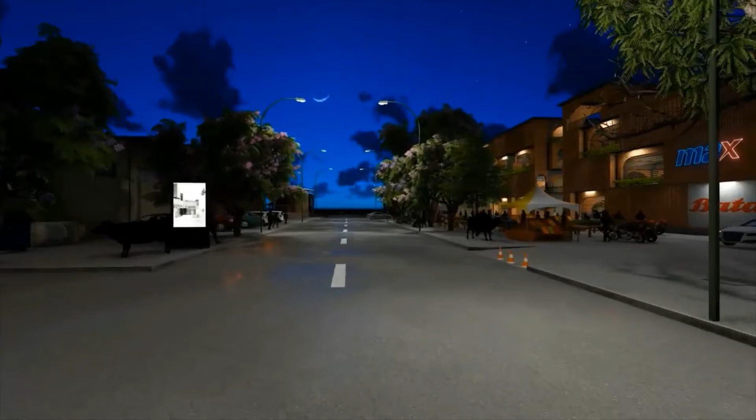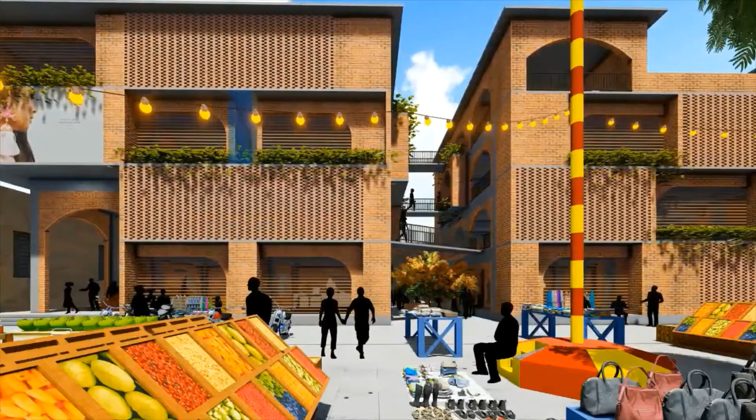The unassuming form of the building subtly highlights the market and the people up front, creating a vivid contrast of colors and texture. It doesn't derive away from what's really important, the people and the culture of the place. In fact, it uses this factor to drive people into the building.

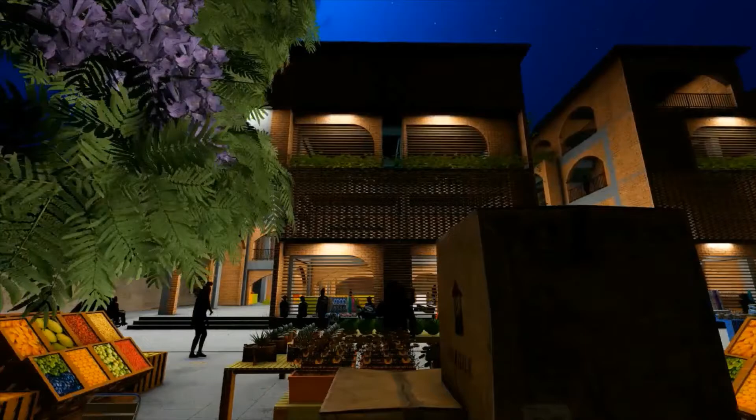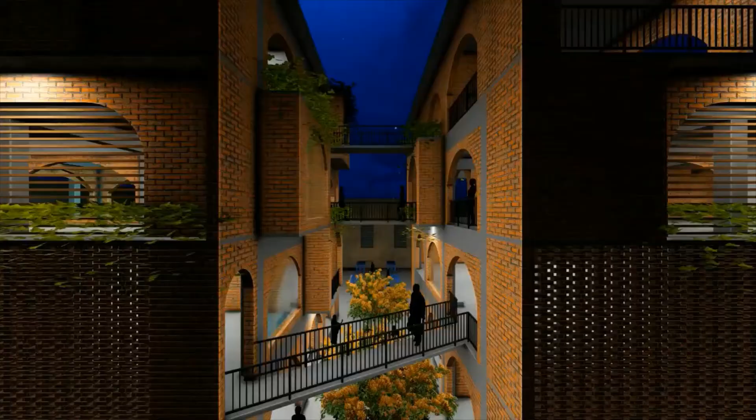The building splits into two to allow a seamless transition between the two markets, integrating it into the building and, in the process, creating a street on its own.

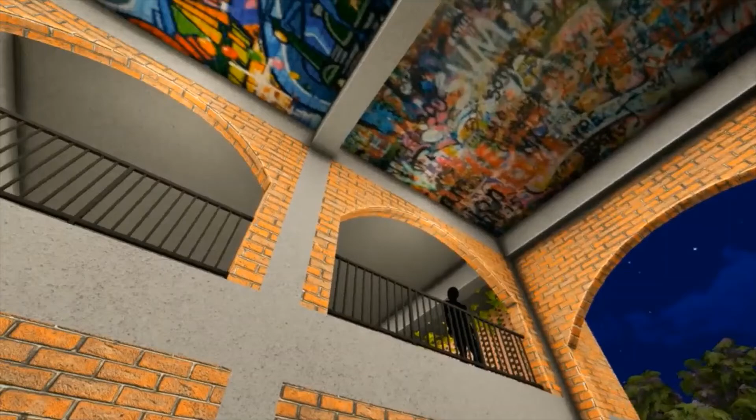It isn't an alienated structure. It is meant to be played with, painted on, touched, and to be made a part of those who use it.

Hi, my name is Aisha Eki, and this is my Semester 5 portfolio.

In this portfolio, I explore the reciprocal relation between my building and the market in front of it. And what better to start this off than a quote by Alberti that inspired a huge part of this process.

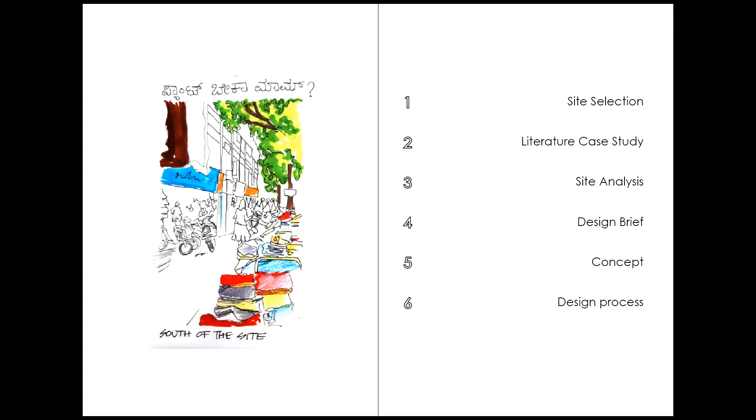I shall be going through my 6 stages of design, and that starts with the site selection.

Starting with the site selection, I'm going to start with the basics. My site is located in the heart of the commercial pocket of Jayanagar 4th Block in Bangalore.

What attracted me to this site was the history behind it. The site originally hosted a 50-year-old commercial complex which was transformed into a dynamic public space by the people. It sprawled out onto the site and acted as a cultural hub that was supplemented by the masjid and the temple close by. It was razed down after a few sections of it caught fire around 10 years back, and the old building was replaced by a mall on another side of the complex, and this proved to be a disaster since it was a complete opposite of the original building.

You can see it over here. This was the old building and this is the new building. This flat ground floor is actually the original building and this new modern building is the new one.

My proposal is to create a new complex that allows a better transition from the old complex with a contemporary take on it. Being a commercial hub and inside a market, it speaks for itself when it comes to selling commercially.

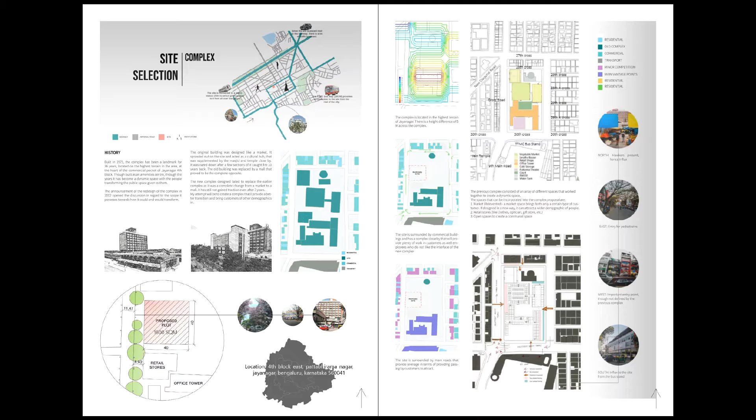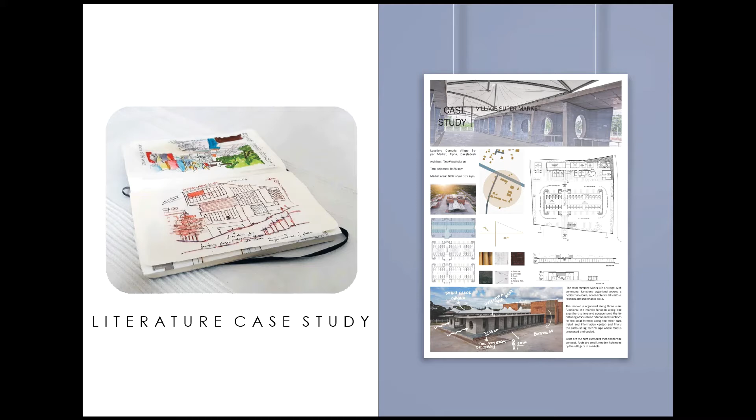After my site selection, I did a literature case study on a village supermarket in Bangladesh called Chep Market, and a complex in Japan called Yotsubako. The reason behind it was to understand these two ends of a stick. They are extremely important to the site, and I won't delve too deep into this, but understanding a market and understanding a complex was essential in my design.

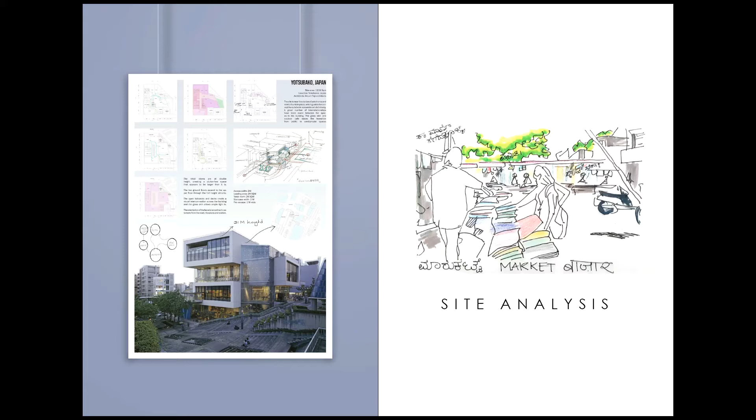Coming to the site analysis, I've tried to look at it from both angles, the tangible and the intangible. The site is surrounded by luscious trees as old as the city itself. As I said before, my plot is nestled between hundreds of other tiny stores.

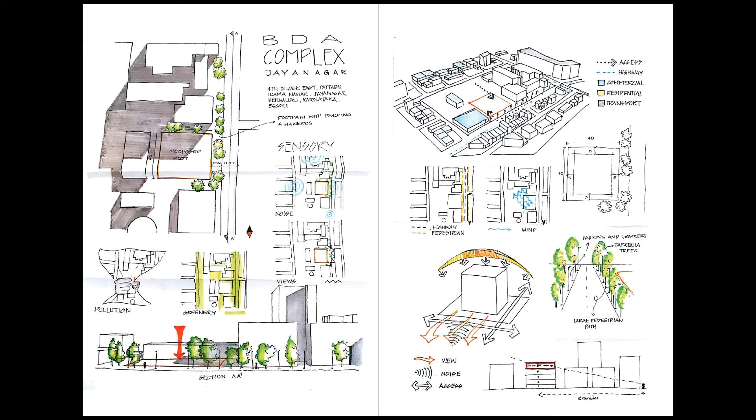I've tried to understand the old complex that existed there, which you can see over here. This was the old bazaar. I've also tried to map out the entire plot and the market up front, though it was quite hard this time because of the crowds.

Nodes are the more active areas within the building based on program or movement, and districts are differentiated areas for differentiated users. Being a child of both a complex and a market, I had to honor the most important requirement, that was visual connection. I tried exploring various ways to do this.

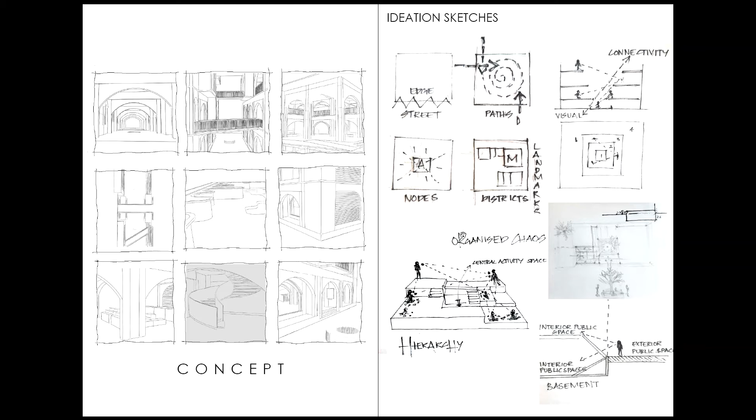Also, bringing the essence of the market into my building was essential, and that's when I struck upon the term 'organized chaos,' which I will be talking about later on.

On the left are design elements that I obtained from analyzing the site. The building, as you can see, is split into two parts, and this was to prevent a split between the market on both sides, creating a seamless transition from one end of the building to another.

The culture and the people are to be highlighted in this building, and the building subtly highlights the market with the contrast of the facade against the front market. I've noted down the keywords that have led my design process over here.

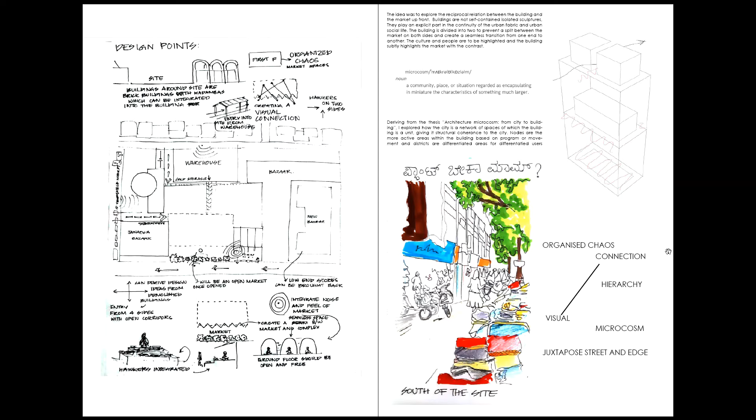Now, coming to the creme de la creme, the design process.

Coming to my ground floor plan. I do have a basement which will be shown in detail later. As you can see, the building is in two blocks, which can be accessed from the central space or from the sides. To make it accessible to the specially abled, ramps are provided on both sides. A statement spiral staircase makes the space more dynamic and leads to the first floor.

The market is in two parts, an open market and a semi-open market. The semi-open market is color-coded so that users can identify what they require from a distance. There are two types of vending stalls in the market. A series of levels create a podium for multiple hawkers, and then there are the standing hawkers over here.

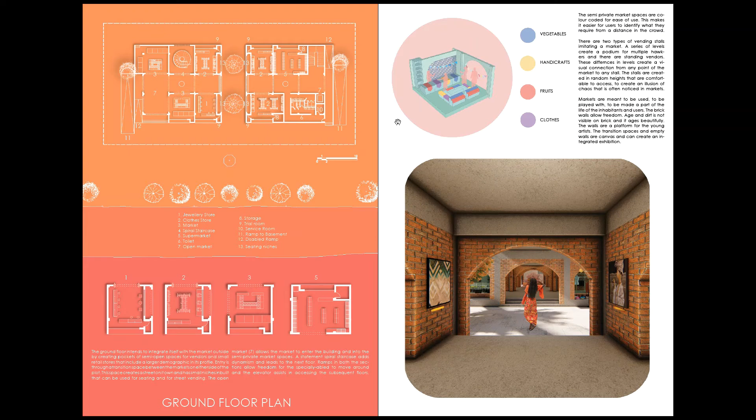In the first floor, a bridge connects the two blocks and overlooks the street below. Certain parts of this facade are arched with wood louvers for protection, while other sections have jali walls. This eradicates the need for any additional air conditioning, and the jali bricks are actually made of mud concrete bricks.

So there's a special reason behind this. The mud is actually obtained from the basement, and parts of the debris of the old building can be used as coarse material in this concrete. The soil in this region is sufficiently strong and requires just an addition of 20% clay. It does require more labor than any other material, but if you look at the flow of money that happens, it is towards the working class and the skilled labor of this market rather than any imported materials being brought in.

The facade also makes way for niches of planters over here that imitate the seating in the ground floor. This makes up for the loss of vegetation on the ground and brings much needed greenery to this dry area.

Large brands are discouraged in this building, but I have put a popular brand such as Max over here. What this does is it encourages a different demographic to join this community.

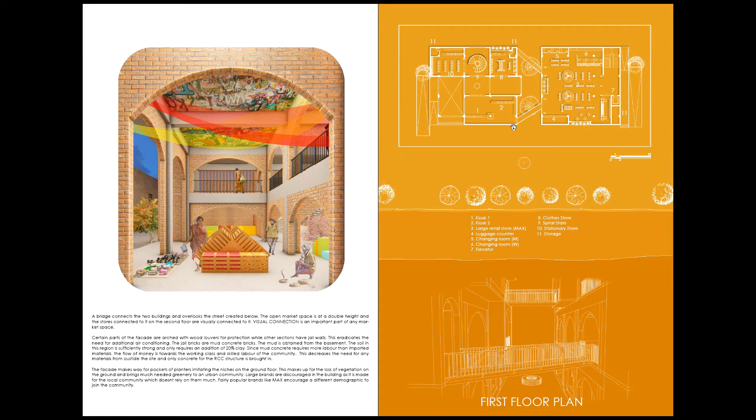The second floor gives way to an exhibition, a bookstore, and a cafe or bakery. This is the bookstore, this is the exhibition, and this is the bakery. What this does is it creates this relaxing space over here. So just imagine walking through this place. You can grab a book over here and grab a coffee, probably walk to the exhibition, have a seat on this balcony. It creates a really relaxing space.

As I said before, my building has a lot of louvers and jalis, but you can see that over here in my exhibition, there is no jali or any opening. This is because any openings for sunlight or wind can prove to be corrosive for the artwork that is displayed over here.

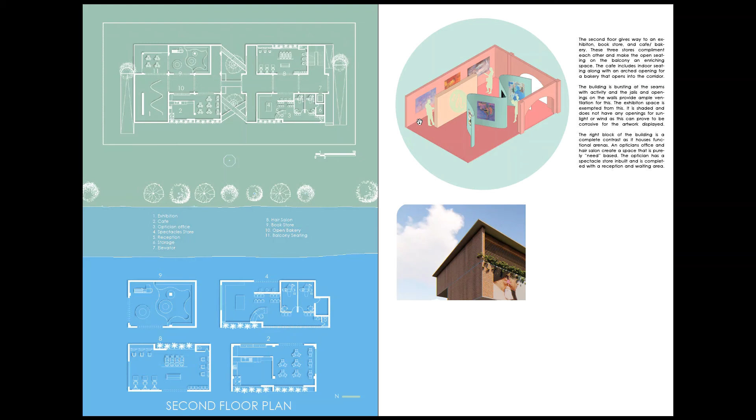Coming to my last floor, this is a food court. The entire space is a food court, and it has a semi-open food court over here, and an open food court over here that opens up to the sky. This place has a fast food store over here and two small kiosks that open into the corridor and uses the arches as an opening space. This is the semi-open food court that you can see over here.

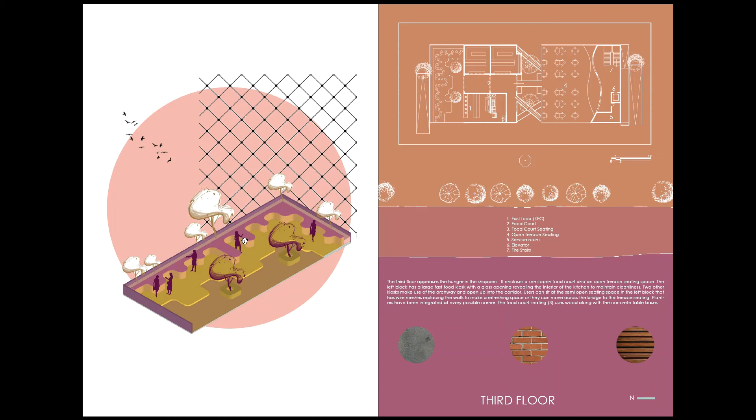Every part of the building can be seen from inside. It creates this tunnel effect, and every part of the building can be seen using the arches. You can see over here there are these cantilevered parts. They create a kind that imitate jharokha windows, and they bring the old Indian charm of a street where you had overlooking balconies and very tightly packed streets. That was actually what I tried to put in over here. There is ample visual connection between each and every part of this building with the other building.